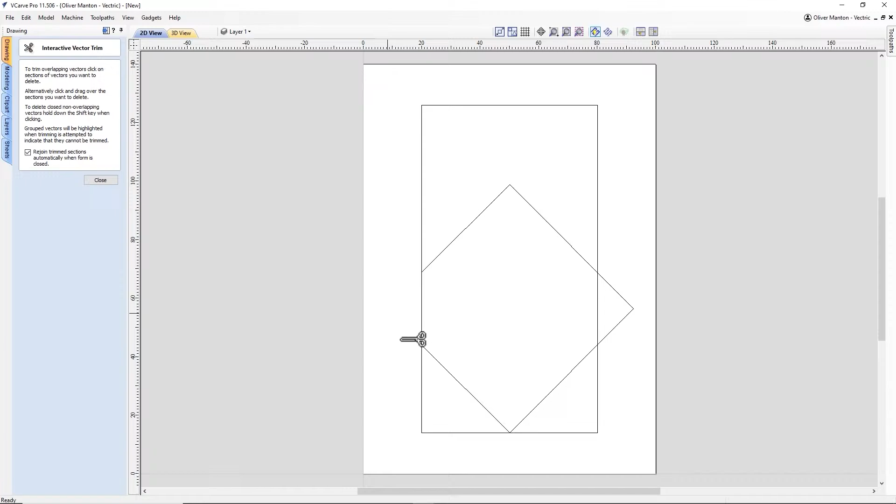For the next step, I'm basically going to be snipping away any vectors that I don't need, because we don't need these. We just want the point. I've ticked the rejoin the trim vector section, part of the form, so that it will rejoin all the vectors automatically. Just go through and cut out any vectors we don't want. Close that down, and then you'll see that we don't need to join any vectors. They're already all joined for us.

Next part is we don't want these square corners. We kind of want a rounded corner, so we're going to go in and fillet these. Okay, for this bit we're going to offset in by about 5mm. So this is going to basically create the basis for where we're going to pocket out.

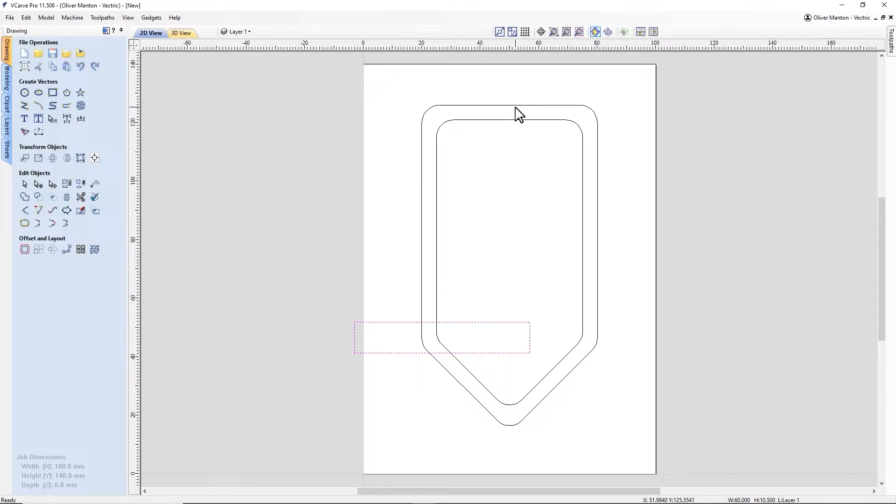Okay, so we've got that there. So the next step is I want a bit of a gap at the top to put a hole through the material, so you can put a ribbon or some thread through to hang the medal or badge around your neck. So I'm going to go with a width 60, 10.5. So this is just going to be a guide for where to position these vectors.

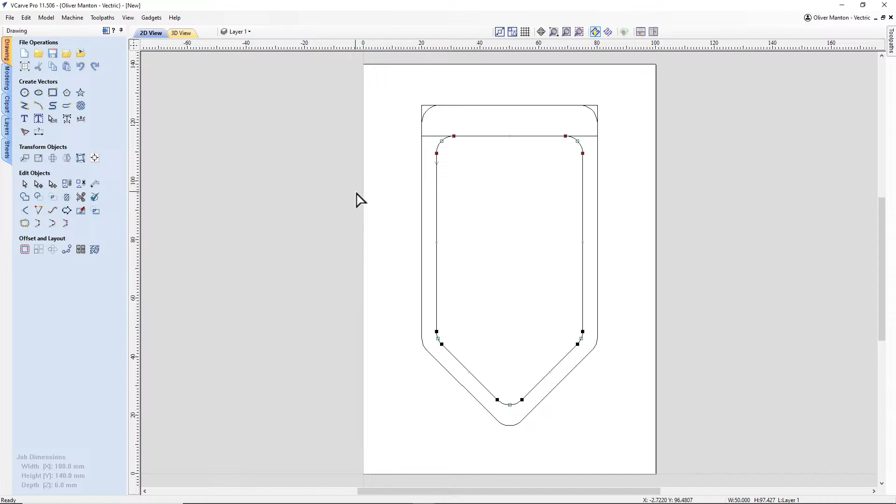So I'm just going to go into node editing mode, move these down to the bottom of that box. Okay, so that looks good. The next thing I'm going to do while I've still got that box is create the actual hole, or the vector for the hole. It's going to be a width of 15 and a height of 4.

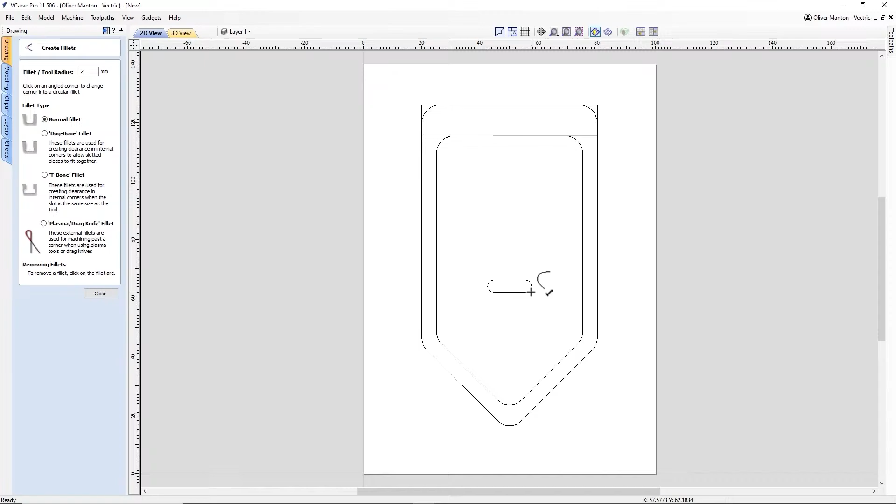We'll then fillet the corners to 2 mil because I want them basically to be a full circle on each end. And I can use this box to center that. And I'll get rid of this guideline.

Okay, so it's starting to come together. For the next step, I want to create the diagonal line where we're going to do some V-carving, because we're just going to pocket out the top and bottom parts here. So I'm going to create a box with a width of 100, so that I'm sure that it will go across, and 11.3 mil in height.

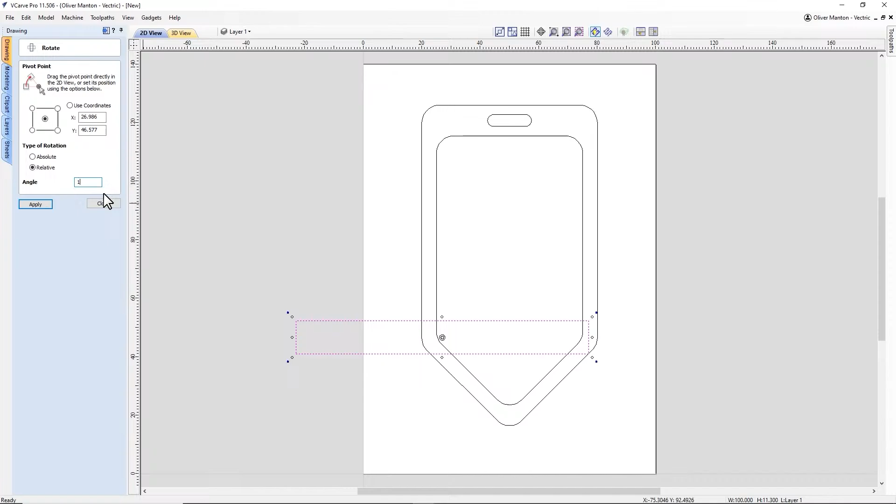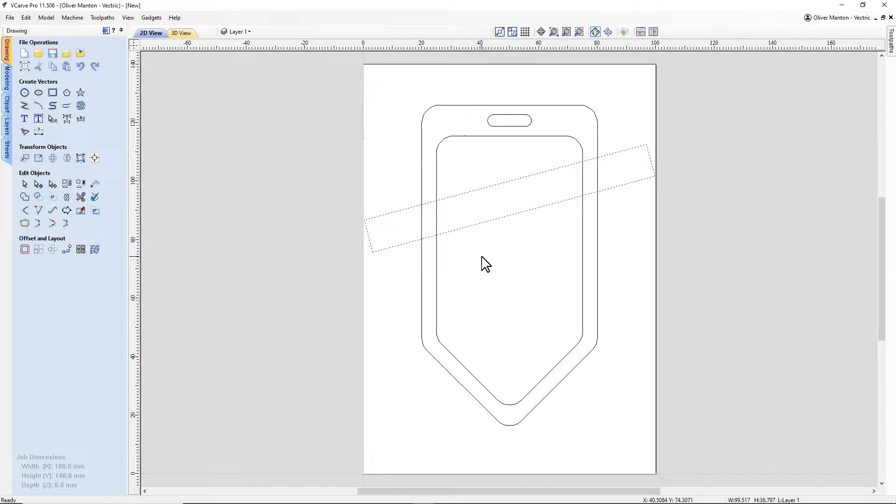Then click R on the keyboard again to rotate, and we're going to do this by 15 degrees. We're then going to center it to here, and then I'm roughly going to line it up. That looks about right. And then we're going to use the trimming tool again to trim out these vectors. And we've still got the rejoin tick on, so that it's going to rejoin all the vectors for us.

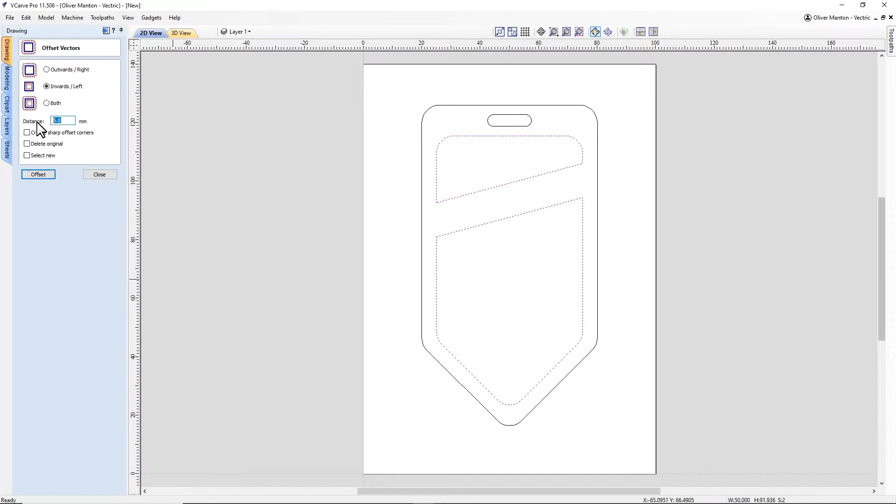So for the next step, we're basically going to be offsetting some of these vectors. We want to offset both of these inwards by 2 mil. And then we can now start adding the text to it. So I'm going to start off by adding the maker, or the text that's going to go here, that's going to be V-carved. So I'm going to draw another rectangle, but this time with a width of 50, and the height I'm going to put as 8.

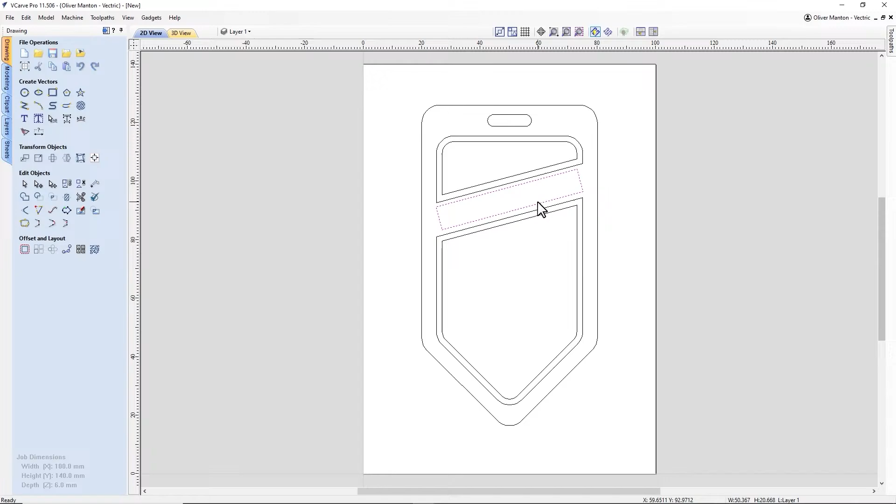And then rotate it by 15. And then center it to the outside vector. Then move it up until we're happy with where it is. Okay, we'll then click this box.

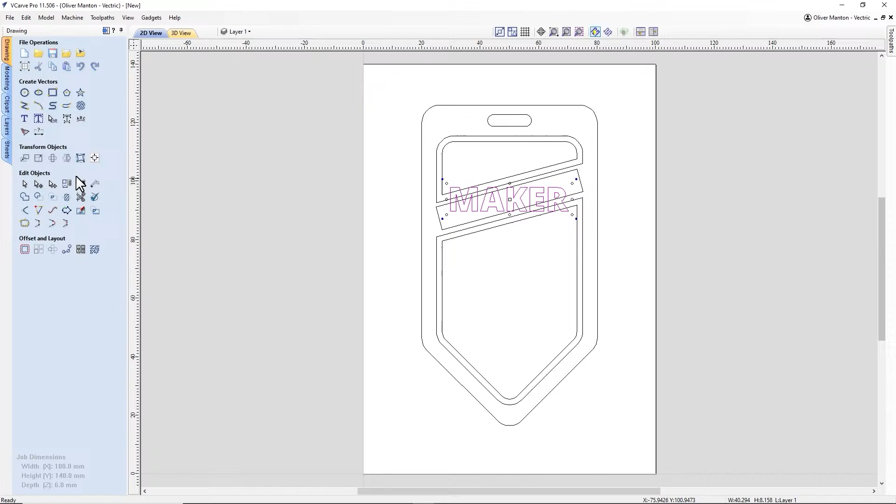So the font I'm going to go with is Open Sans Extra Bold. And then what I'm basically going to do, rotate it by 15, is try and get it to fit the box. So we go there. Okay, that looks good.

Okay, now we're going to do some distorted text for this top bit. So I'm going to write Vectric UGM and get it to fit within this space. So what we first need to do is offset the vector inwards by 2 mil. Then we can shift the vector over here.

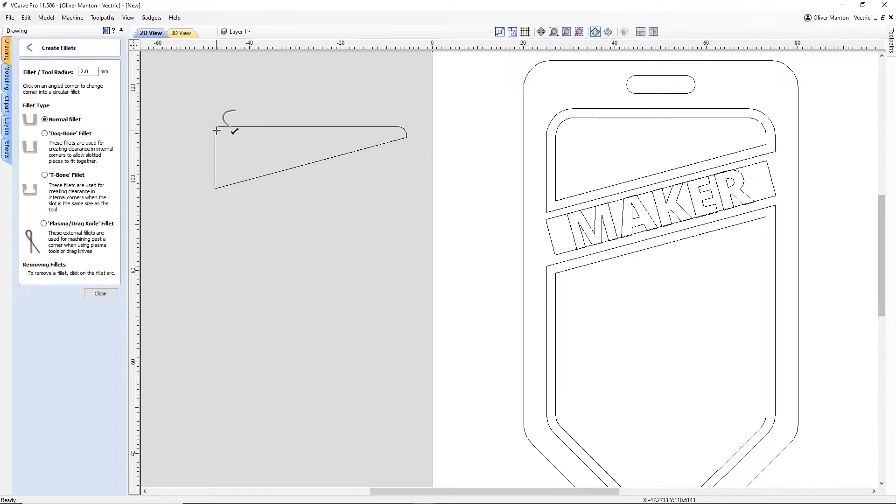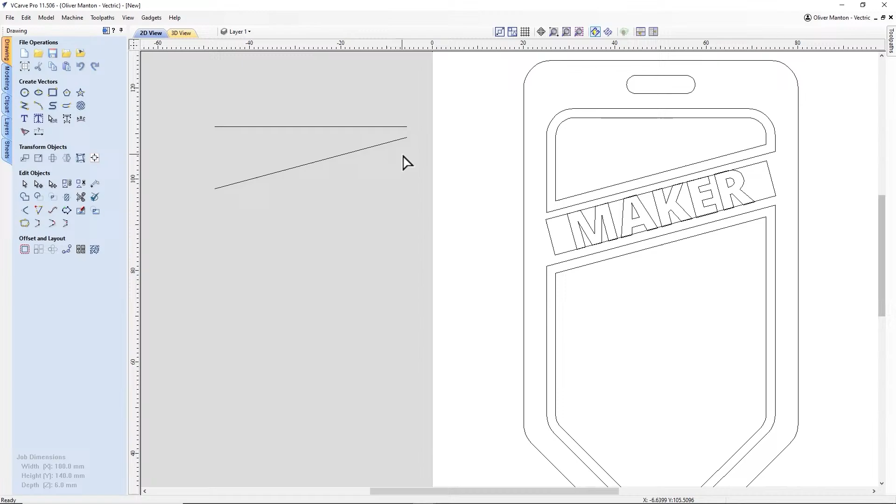So basically I'm going to take out the fillets or the rounding of the corners, so I can then get rid of these 2 side lines, because we just want the top and the bottom vector to distort it with. So if we then click N on the keyboard for node mode, and then delete these, delete the points. Okay, now we've got the vectors, we just need to do the text.

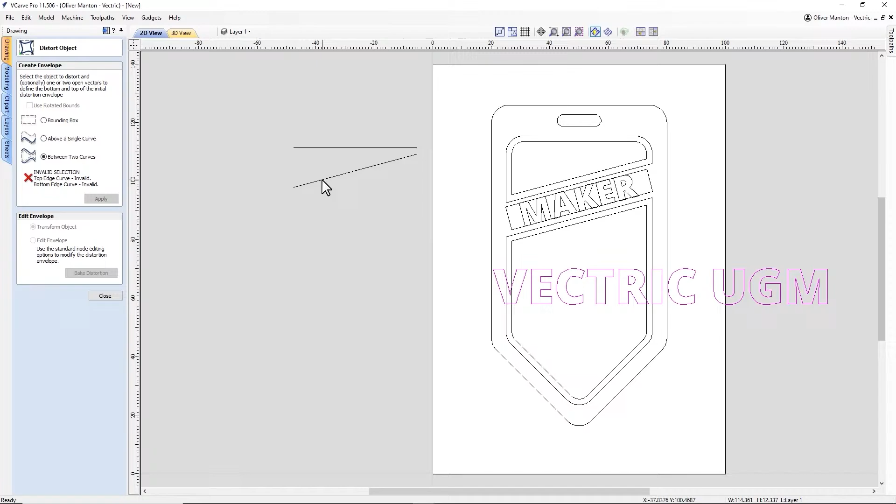So if I type out Vectric UGM, close that. What we want to do is use the distort selected objects tool under transform objects. So we're going to click this and then go between two curves. We select the text, the bottom vector, and then the top vector, and then click apply, and that's now distorted the text.

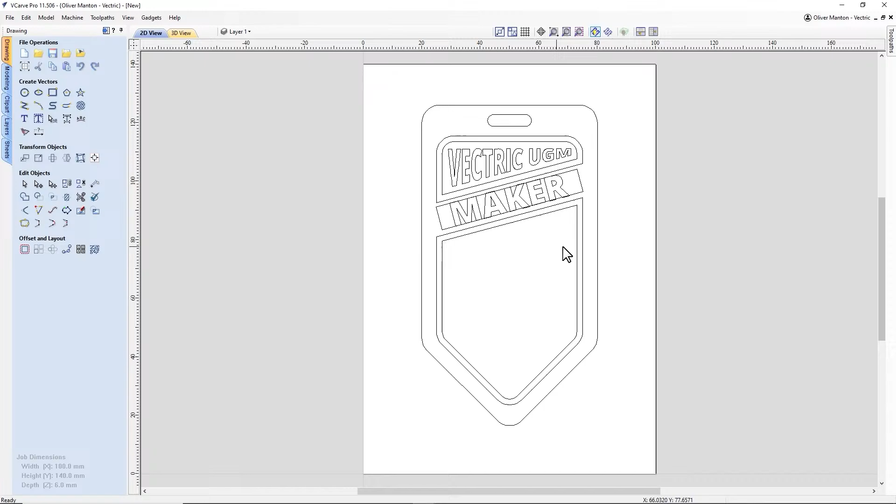Now that we've got that, we can, with the text selected, select this one and then center it in place. We can then delete these vectors because we don't need them anymore. And then that's that top part done. So for the next part, it's going to be the name part of the badge or the medal.

So what I'm going to start by doing is creating a box. It'll fit in there. It's about 11, 12 mil high. We're then going to use that to put the text in. So I'm going to just put my own name for the moment. So basically by bounding it to this box, any text that we put in there will then fit to that box.

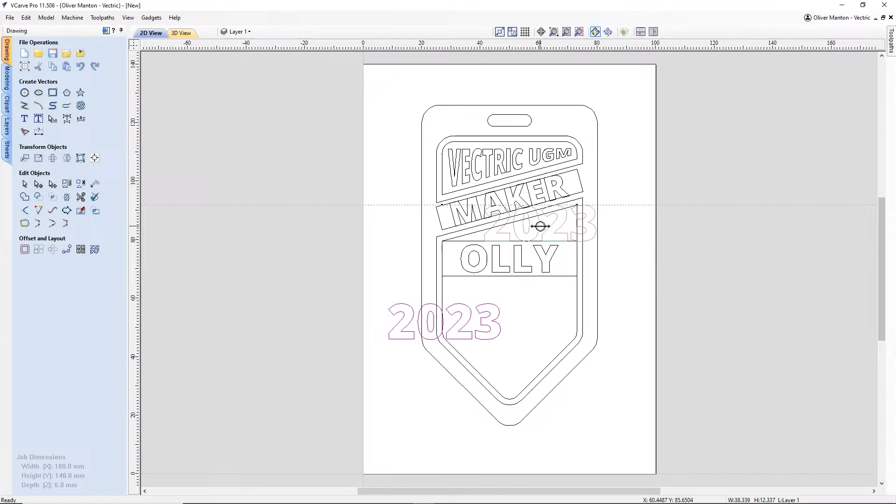So for example, if we had a longer name like Charlotte, it would then shrink to the size of the box. I'm going to leave it for Olly for the moment. And close out of that. So that's that bit. The next part of the text that we're going to do is the year. So we're going to put 2023 up here, just to signify when it was. Okay. So what we want to do is just bring that up and then scale it down to fit.

I'm just going to do this by eye for the moment. That looks pretty good. So now that we've done all the text parts, it's now on to creating the bit down here.

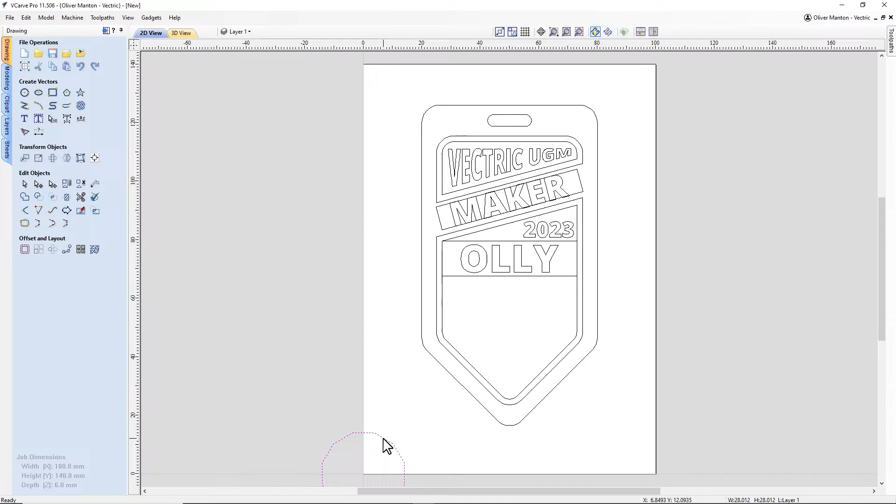So we're going to insert a 12-sided shape or a dodecagon. So the way we're going to do that is if we go into this tool, draw polygon tool, and we're going to create a 12-sided shape with a radius of 14.5. We create that and then center it to here.

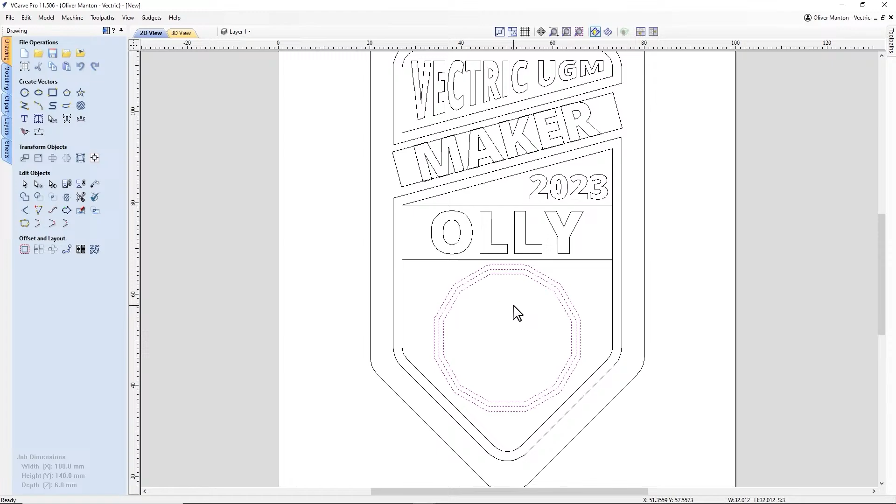Okay, going to move it down a bit, and then we're basically going to offset it, selecting the new vector outwards by 1 mil, so 1, 2, twice. So basically the first vector is going to be for the pocket, and then the other two are going to be the laser toolpaths. We select those and we can just line them up to where we want them. Okay, that all looks good.

Okay, for the next step, we're actually going to import a vector. So if we go to documents, and then we're going to import the V. So basically this is a vector that we've been given from our graphic designer. So he saved out a DXF file so that we can use the vector for this project.

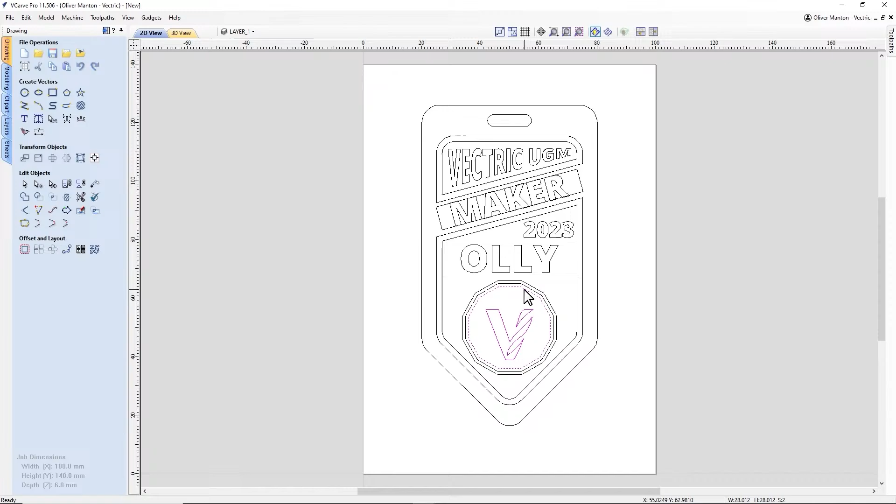If you are creating your own medals or badges, then it's probably worth asking for any graphics like logos, etc., whether you can have them in vector format, because that would really help for these projects. Okay, so we're just going to center that within there and then close that down.

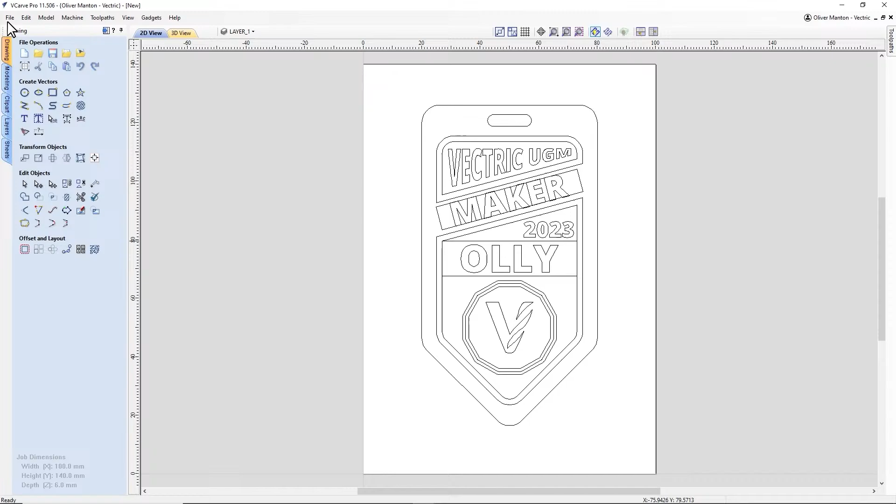And then the last bit that we want to do is just create the map vectors for around the V. So for this, I'm going to import a bitmap. So Vectric UGM, open. Okay. I'm going to move this to over here, just so that we can get the vectors out of the way of all of these other vectors.

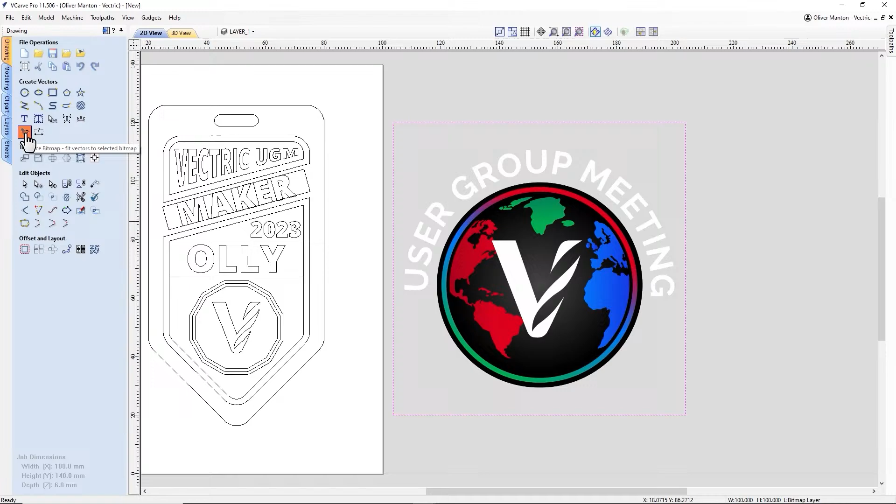Okay, so we're going to want to use the bitmap trace tool, and then we're basically just going to want to select the vectors that we want. If we go around, that looks like, because I only basically want the world vectors, and that's it. So we can preview that and then click apply, close that down.

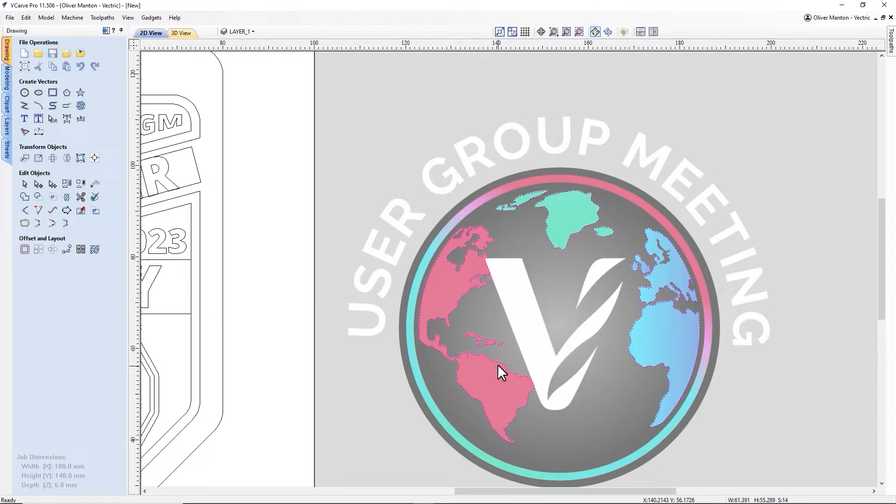Okay, what we can now do is ungroup the vectors and delete any that we don't need. It might actually be easier to select the ones that we do want by deselecting them. Then we can delete the rest out of there. We can then group these objects back together and bring them over.

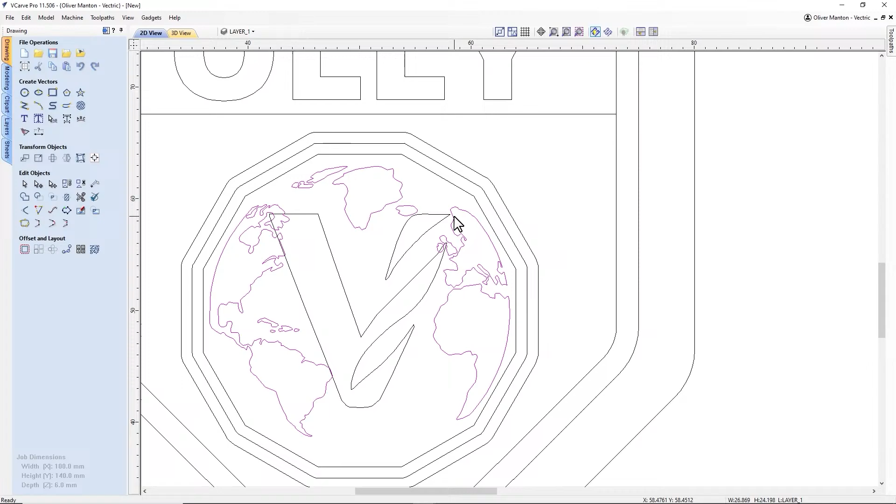So what I'm basically going to do is scale these down to a rough size. Okay, and then we can see if we center it what it looks like. Can actually move up a bit and across. That looks to be good. So then what we can then do is get rid of any crossover points. So what I'm going to do is go around and trim any of these.

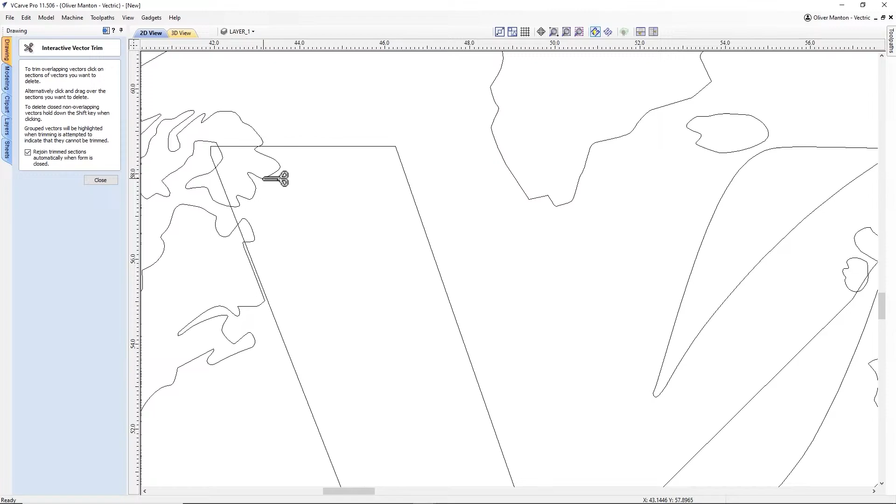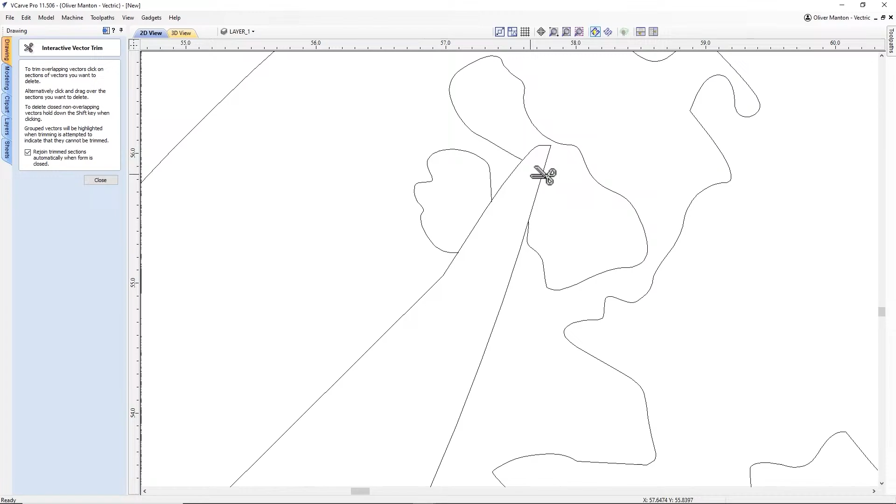So I actually have to ungroup these onto the original layer, and then we can go and trim them like so. And then we can group them all back up together. Then we can get rid of the bitmap because we don't need that anymore. Okay, so that's all the vectors done that we need to do. So it's now time to start doing the toolpaths.

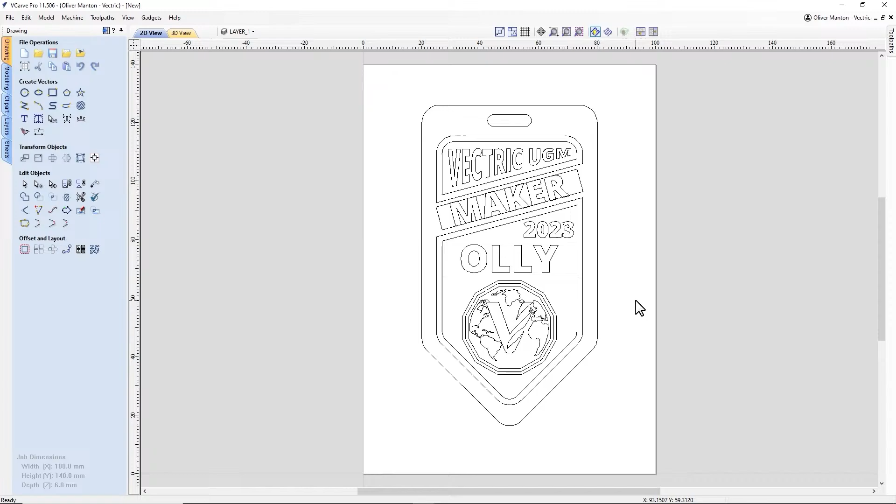Okay, so if we go over to the toolpaths tab and we split the screen so we can see the 3D view as well. So basically, the first pocket we're going to do is actually the pocket octagon. So we're going to pocket this out. Okay, we're going to go down 4mm for this one and then 2mm for the other pockets. So this is going to be the deepest pocket. I'm going to choose a 1/8 inch end mill and we're going to go with these settings.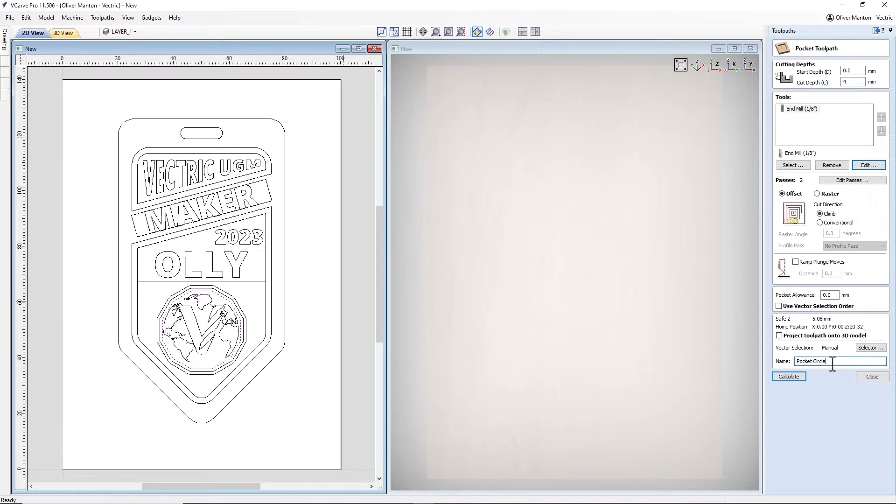Okay, I'm going to name this pocket circle. It's going to be an offset with 2 passes, and then we calculate that. Preview the visible toolpath. That all looks good. Okay, so the next one we're going to do is the big pockets, which are the outside vectors. So these ones, not these ones, because those are the laser ones.

So we're going to pocket down again. This time we're going to go down 2mm using the same tool, 1 pass. So we could name this one Big Pockets. Calculate that. Preview the visible toolpath.

Okay, so the next one we're going to do is actually the maker text. So this is the VCarve one, and then we're going to do VCarve text. Calculate, preview the visible toolpath. That all looks good.

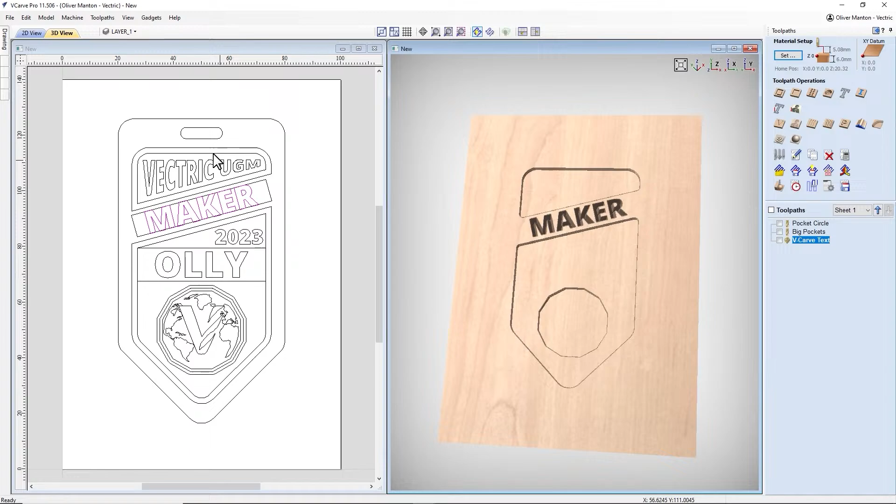Okay, so the next one we're going to do after that one is the pocket on the top. So actually going to use profile cut. We're going to go all the way through our material, so Z plus 0.4. We're using the 1/8 inch end mill again. We're going to go inside the line because we want to cut inside. And we're going to use profile hole top.

Calculate that. So this is basically just a warning to say that we're going to cut through all the way through the material, which is what we want. Preview the visible toolpath. As you can see, that's gone all the way through.

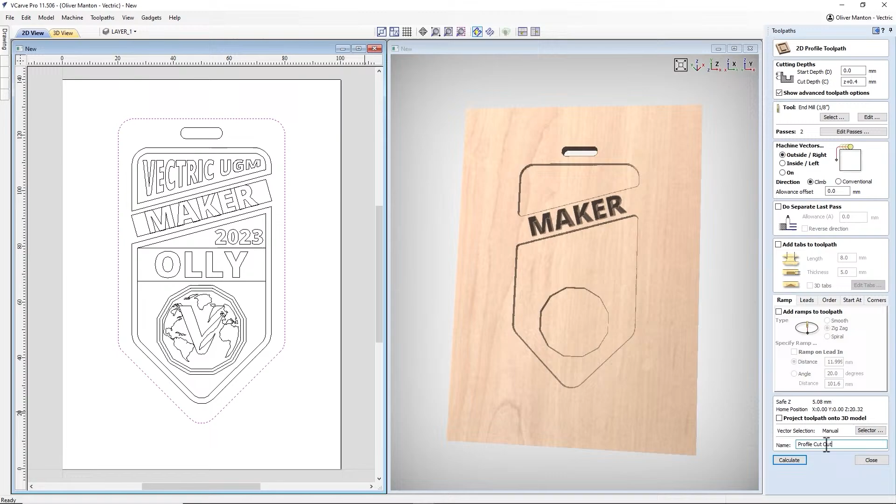Okay, so the final toolpath we're actually going to do using the CNC bits is a profile cutout. So Z plus 0.4 to cut all the way through. We're going to go outside because we want to cut outside the line, and profile cutout. Calculate that. It's going to cut all the way through the material again. Preview that toolpath, and then we can have a look at it in the preview.

So basically the reason why we can do all of these toolpaths first before any lasering is the laser isn't actually going to move the material, it's just going to laser onto it. So we can basically do all the CNC toolpaths before the lasering.

Okay, now we're going to move on to the laser toolpaths. This is where the hybrid machining comes into its own really, because we can then laser onto anything that we've carved out. So we're basically going to set up the laser to laser in these pockets and this pocket here. I'm going to adjust the depth of the laser by 2 mil because that's the depth between here and here, and I'm also going to adapt it to 2 mil down here as well from the material surface,

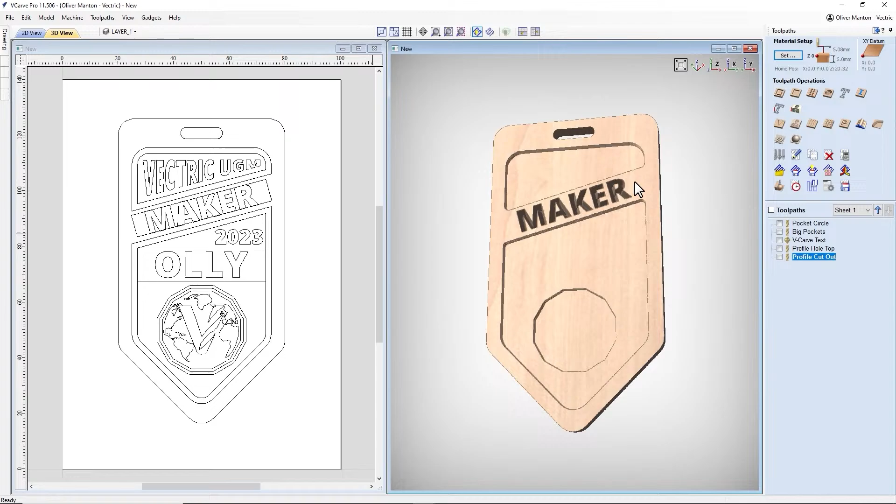which will be the top layer. Okay, so the first part that we want to laser is these two vectors, so the Vectric UGM. So we're going to go into the laser toolpath, and we're basically going to input the settings that we're happy with.

Just to pause quickly to say I did do quite a few tests before actually finalising the settings for these. So I guess depending on your laser and the settings and its power as well, you'll need to probably do a few tests before you actually commit to making your first medal or badge like I've done.

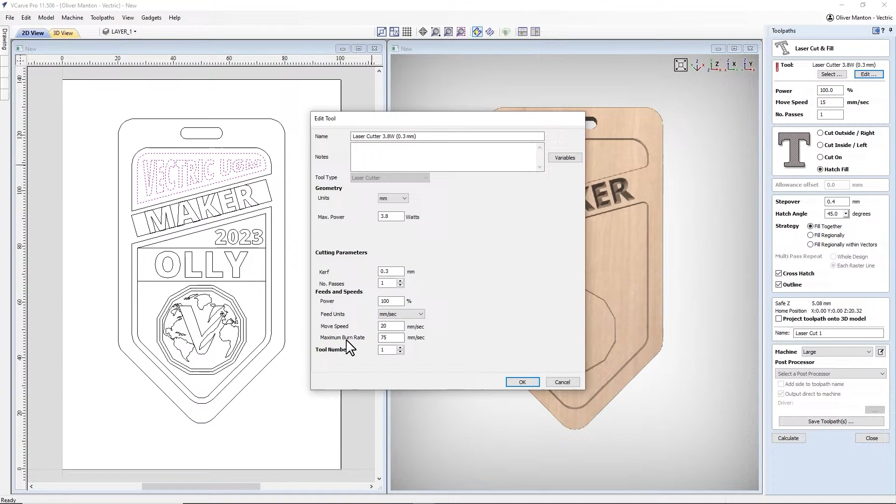So if we start going through the settings, we're going to go for 100% power and 15 mm/sec move speed, and then number of passes is 1. You can also edit these within here. So basically these are whatever your laser settings will be, and the maximum burn rate here is so that in the 3D preview you can alter this so it matches the color of the burn that you're getting from your laser at certain settings, so that you can get an accurate representation of your laser's power within the software. So if we just change that back to 15.

Okay, so for this first one we're going to hatch fill. We're going to go with a step over of 1 mil, and we're going to hatch fill at a 45 degree angle. We're going to cross hatch and outline. So that means we're going to go diagonally across this way, and then we're going to go around with an outline. So that then means that the text and the outline will really be exaggerated, which is what we want.

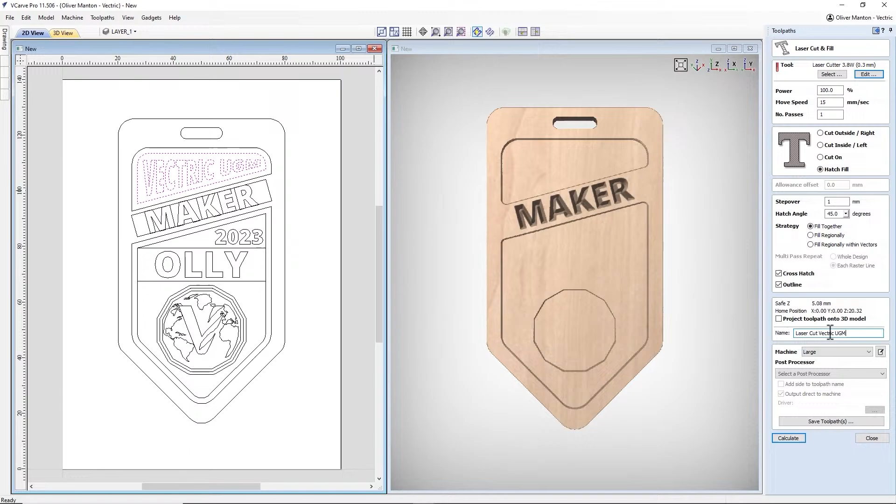And then we can rename this to laser cut Vectric UGM, and we can calculate that and then preview it in the preview. So as you can see, that effect is going to look really good on the contrast from the pale wood and then the darker laser where it's been.

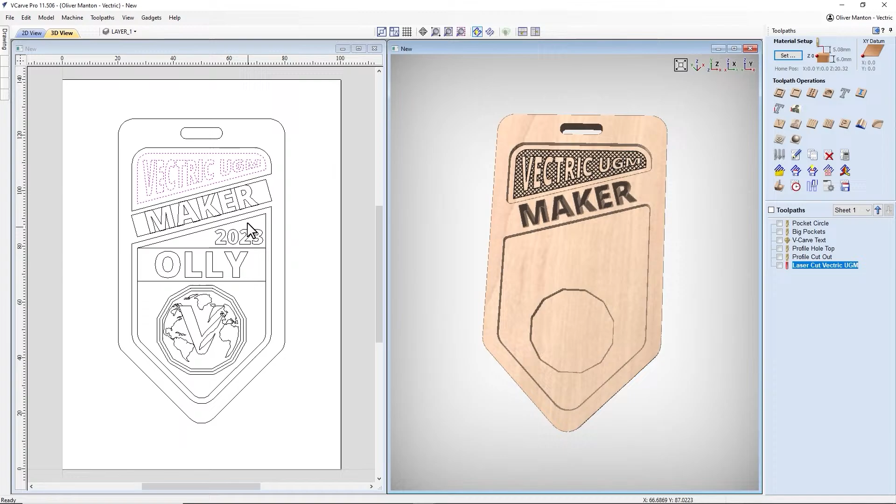Okay, so moving on, the next toolpath we're going to do is the outline. So select that one and then these two, because we've already pocketed out this one. Going to go up to the laser again, and we're basically going to set the power to 100, the move speed of 15 mils per second, pass rate of 1.

On this one we're going to cut on the line. So basically if you're going to cut on the line, it's going to grey out all these settings because these are basically just for the hatch fill. And then we're going to rename this one outlines, calculate that, and then preview the visible toolpath.

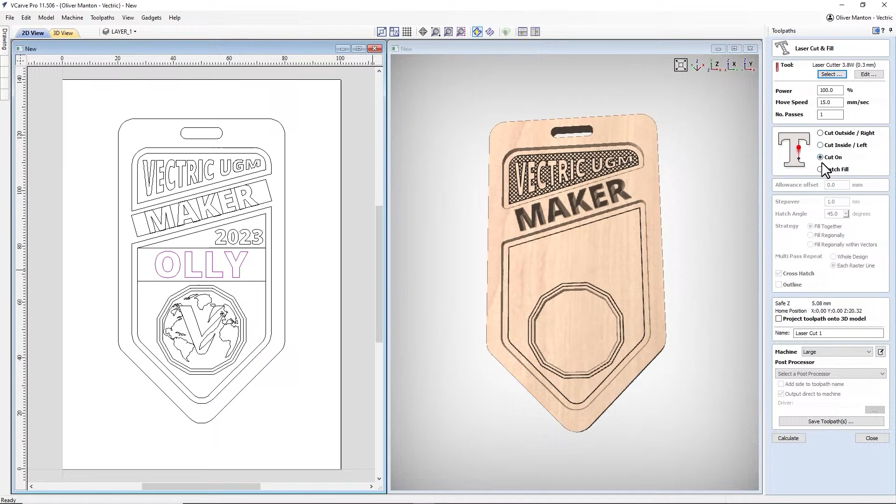The reason why I've gone for this one is just to exaggerate the pocket and also this middle bit to draw attention to it. Okay, so the next one we're going to do is the name. So this is pretty similar to the last laser toolpath we did. So we're going to go with 100, 15, 1, cut on the line. And then I'm going to rename this name and calculate that.

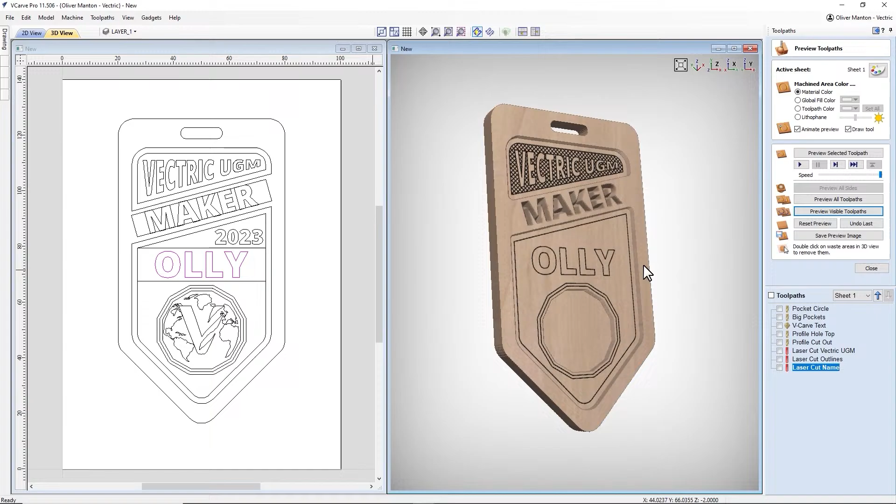You could run both of these laser toolpaths at the same time, but I've decided to run them separately. So the name and the outlines, just in case I want to make the name a bit bolder and run the laser toolpath again, I can do that. So that looks good there.

Okay, so the next one we're going to do is 2023. So this is a little bit different. So basically what we're going to do is we're going to go for 100% power, but a move speed of 20 mils per second. We're going to hatch fill. We're going to use a step over of 0.5 mil, and we're going to change the hatch angle to 0, so it's going to be going horizontal now.

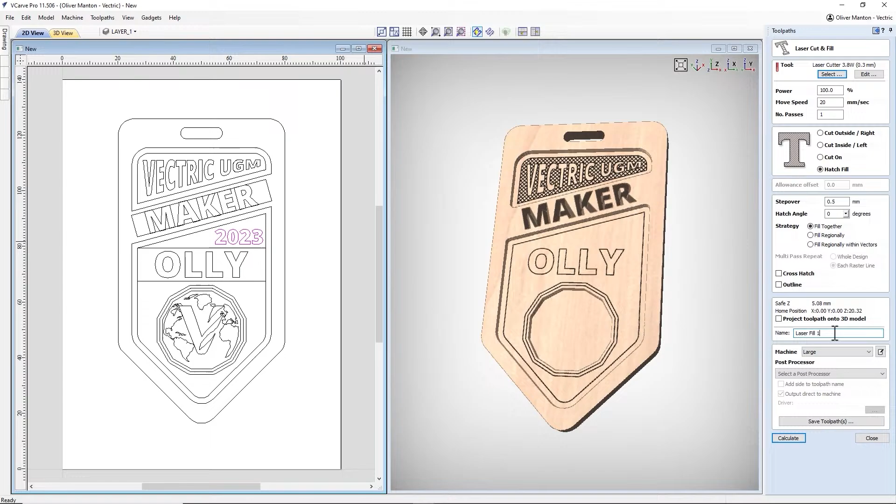And we're not going to cross hatch, we're just going to hatch fill along those lines, and then we can put 2023 here, calculate that, preview that, so it should come out really well and create a cool effect on there, which is just something different.

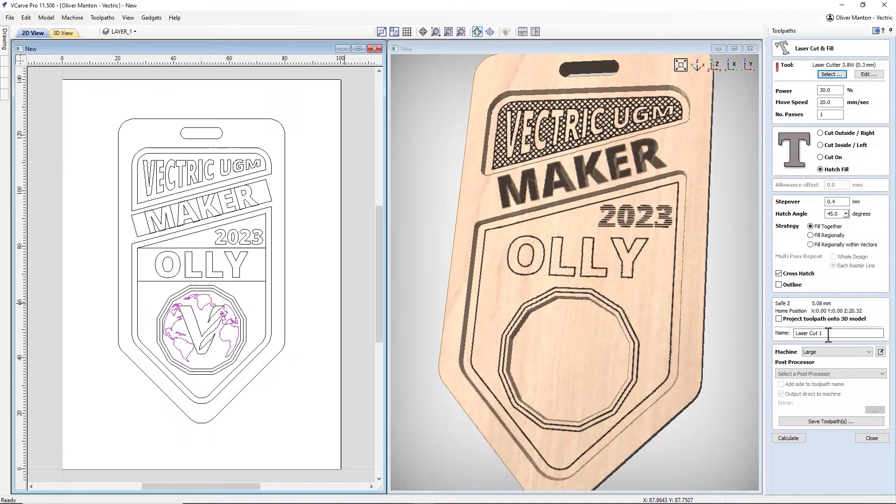Okay, so next it's the map part. So we're going to go in here, going to go with the settings of 30-20, fill 0.4, 45-degree angle, and then laser map. Calculate, preview that toolpath, that looks good.

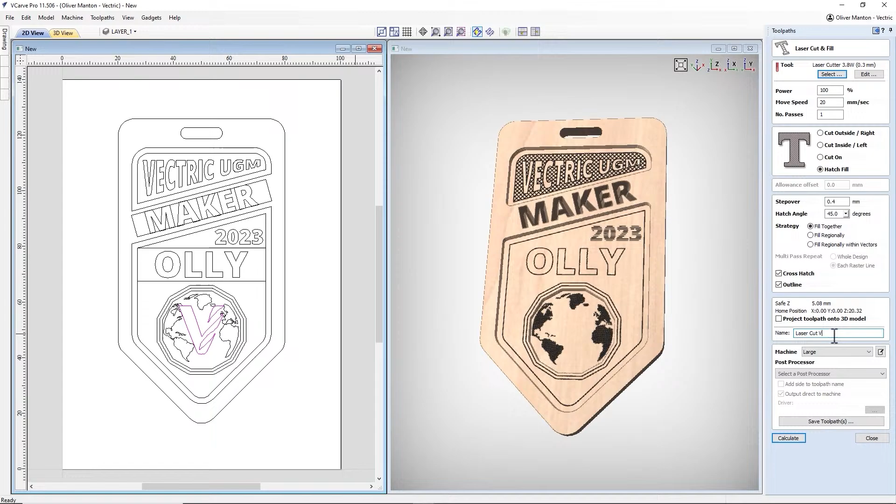Okay, so the last one, the V. So we basically want the V darker than the map, so we're going to go with these settings. So we're going to go 100, 20, 0.4, and hatch angle of 45, and we're going to outline it as well. And then laser cut V, calculate, preview that toolpath. Okay, that's all looking good.

Okay, so now that we've done all our toolpaths, all that's left to do is save them out and get into the labs.

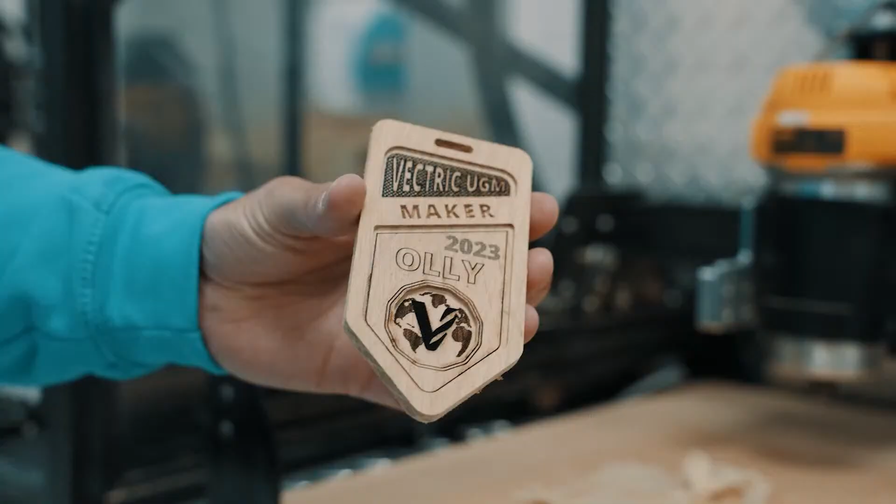Cool, I'm really happy with how that's turned out. Now let's get back into software to create a bunch of these that have been personalised with a plate production feature. So the plate production tool is a really helpful feature if you're making multiple versions of the same thing. For example, these UGM badges or medals.

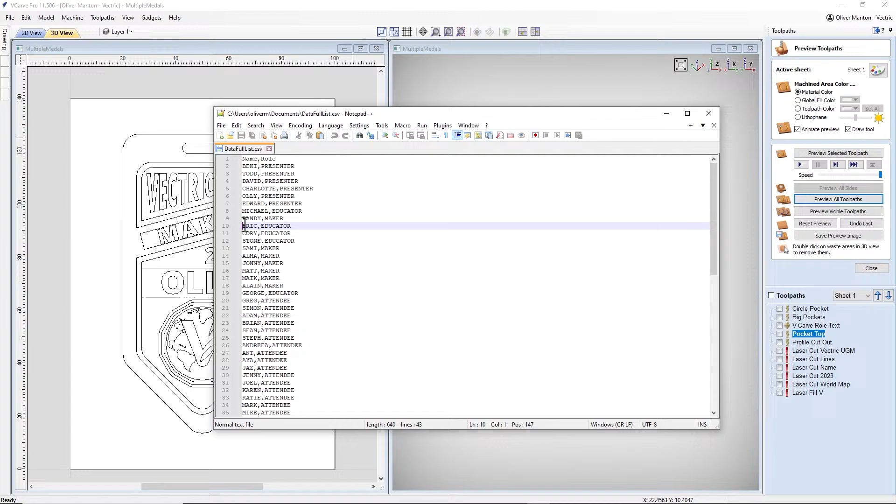So basically what it does is it takes a list of fields within a CSV file and it then outputs them into the software, duplicating all the toolpaths and all the vectors for as many fields as you have. So it's a really quick and easy way of outputting lots of data and lots of the same thing without having to copy all the vectors and then go in and edit all the names, etc.

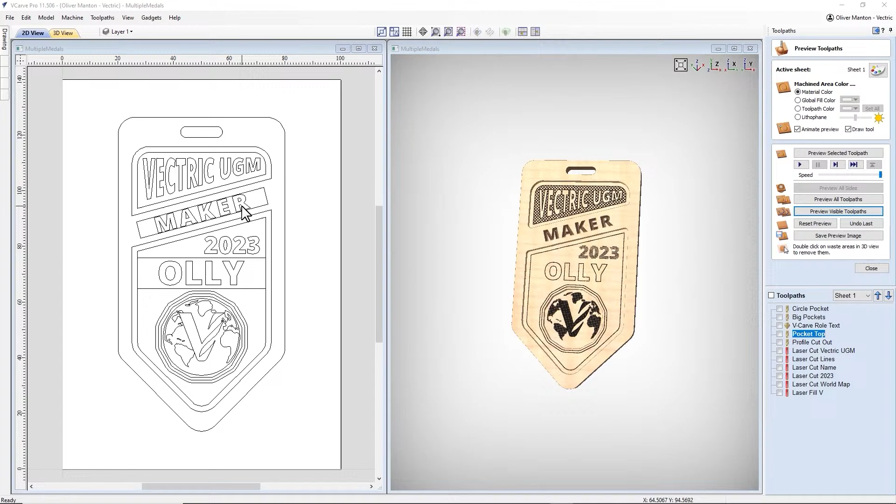So the first thing we need to do when thinking about what we're actually going to do for the plate production tool is work out what fields we want to change. So in this example, I'm going to be changing this field, so that's going to be called role, and then this field, which is going to be called name. So basically, when we go into the spreadsheet, we're going to be creating two columns which match up with the amount of fields that we want to change.

So if we just go into a blank spreadsheet, we can start to create the data that we need. So first column will be name, and then the second will be role. Obviously, the more columns you have, the more fields that you can change within your design. So these will correlate with the variables that we select within the software. I've already pre-populated some data that I've just copied in.

So I've got basically a list of names and then a list of roles that I want to create the medals. As you can see, we've got 41 fields here, which is 42. So if we exclude the top line and just this data here, we've got 41 medals that we want to make. So the next step will be saving it out as a CSV.

So if we go File, Save As. So within here, we want to basically be saving it out as a CSV. So if we go down to this drop down, text CSV, we can then rename this to data full list of medals.

Click Save. This will then bring up this, so use CSV. And then within here, we want to click the drop down, select the comma one, and then the string delimiter is quotation marks, and then save the cell content as shown. We don't want to formulate anything. Basically, we want to save it out as a basic CSV file with commas to separate the values. Click OK, and that will save that out.

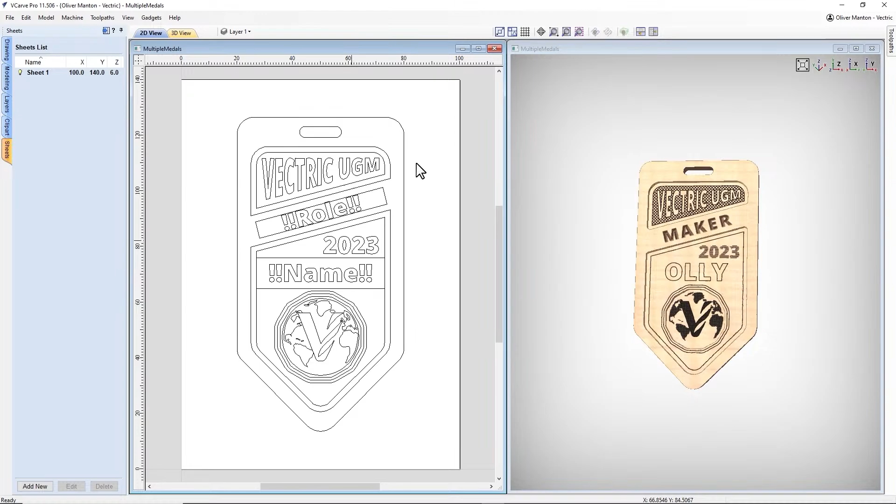So next thing we'll need to do is, obviously we need more material because this is just enough material for one. So to start off with, I'm going to create quite a big sheet, and then I'm going to show you how, depending on your size of sheet, it will depend on how many sheets it then outputs. So if we start off with quite a big one that will fit all of the medals we want into one space, I'm going to go with a width of 700 and a height of 650. Click OK.

And then go back to the drawing tab. So for this part, I just want to reset the preview and make sure that we've got all the toolpaths we want, because once we've used the plate production tool, it's quite hard to change any of the toolpaths or any other vectors within it. So it's worth checking that you've still got all the ones that you want.

Okay, because we've increased the sheet size to quite a large sheet size, it's now looking blurry. So a top tip here is you can go into toolpaths, preview simulation, and set it to whatever level you want. Obviously this is personal preference, and if that was okay for you, then you don't need to change this because it will slow down your previewing time. So we preview all toolpaths again. And as you can see, it's much clearer now, which is what we wanted.

The number of plates, so it's automatically calculated the size of the sheet and then the best number of rows and columns. That's good. Okay, now we need to import the file. So if we go data full list, open. This has imported all the data. And then we now need to say how we formatted the data.

So I've actually used comma separated, and I've also included the name and the role, as you can see, as the first column names. If that was unticked, then that would then count as one of the medals, but we don't want that, so it's going to discount that data.

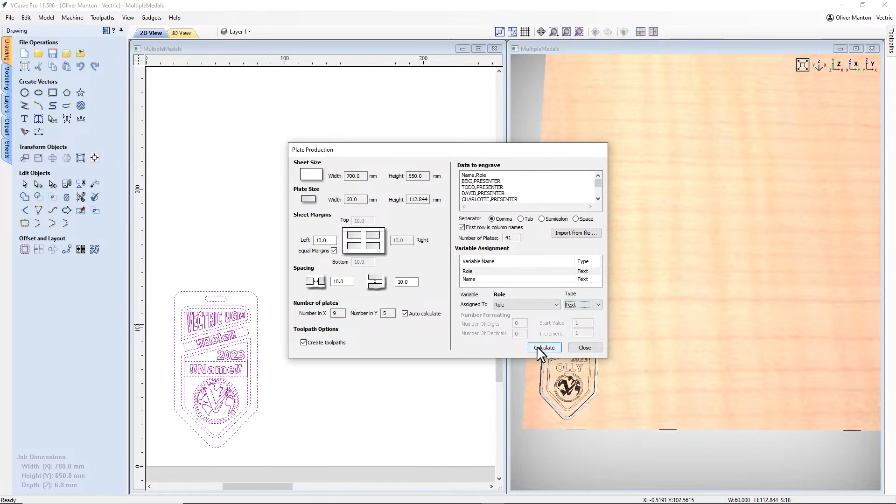We then need to select the right variables, so the right data. So we've got role, which I've assigned to role, and name to name. Obviously, sometimes when you're importing in the data, these might be assigned to the wrong field, so you just need to double check this. And then the type, you can do number or text in here, but all of ours are text formatted. Okay, so now all that's left to do is click calculate.

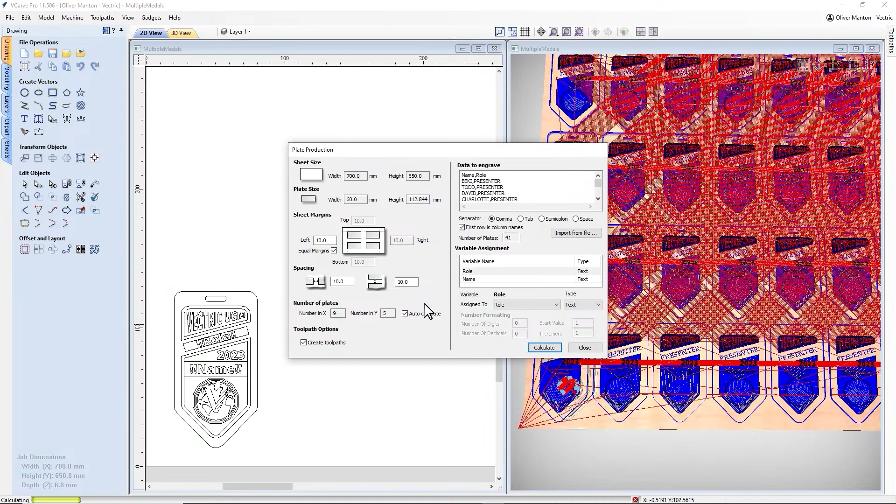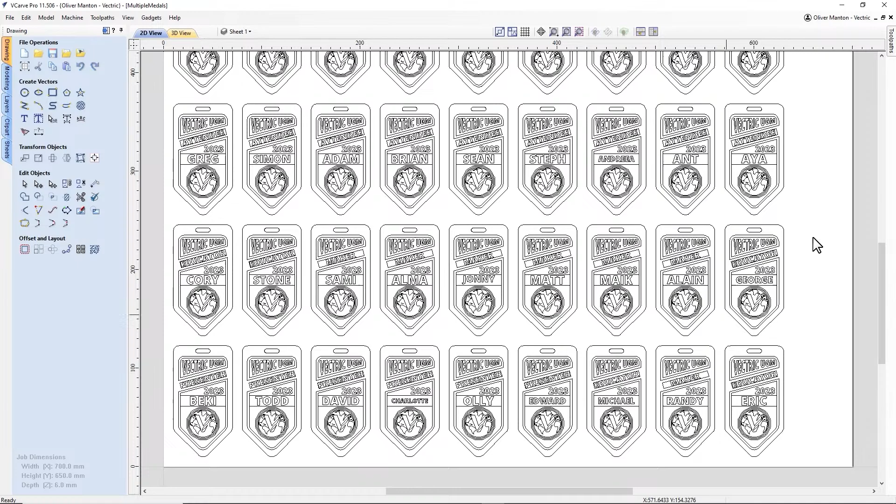So this is basically just going to go through and duplicate all of the toolpaths and all of the vectors with the names and stuff. Okay, now that that's all done, we can close out of this, and then we can check what the output has been. So as you can see, if I full screen this, we've got the attendees towards the top, the makers and the educators in between, and then we've got the presenters along the bottom piece here. So that all looks good.

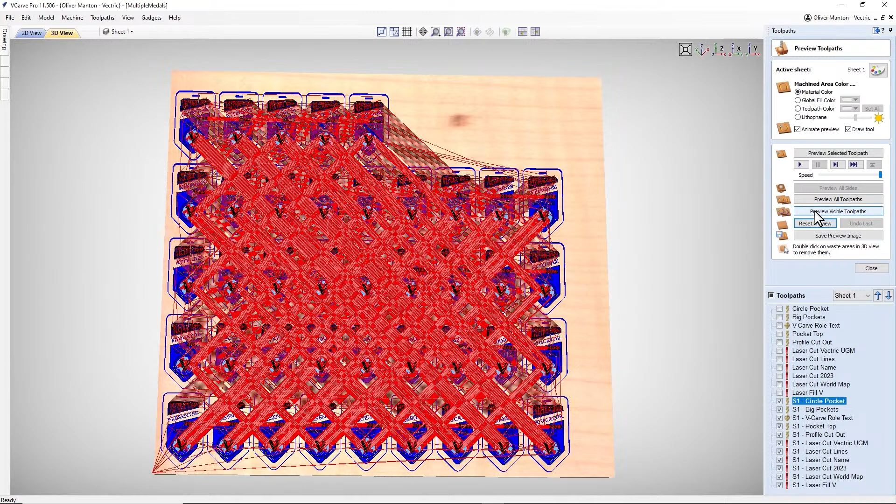And if we head over to the toolpath preview, full screen that. So one helpful thing is, once you've calculated them all, it will automatically only select the toolpaths associated with that sheet. So you can reset the preview and then just preview visible toolpaths. If you did preview all, you're going to be previewing the one medal toolpaths as well, which we don't want. So as you can see, it's just going to go through and run all the toolpaths. So it's going to start off with the circle, then the pockets, etc.

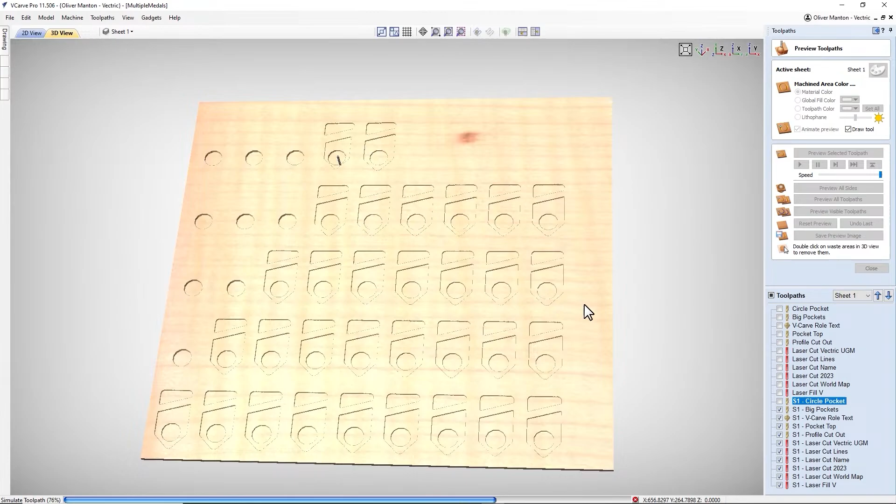One thing that we are actually going to do is move the VCarve toolpath up, so that will make our machine a lot more efficient, because then there will be fewer tool changes rather than changing from the 1/8 inch end mill to the V bit and then back to the 1/8 inch end mill. As you can see, as we've got it on a higher preview resolution, it's taken a bit more time. Yeah, it's all done, and then we can zoom in and see if it's all as we expect. Those are all looking good.

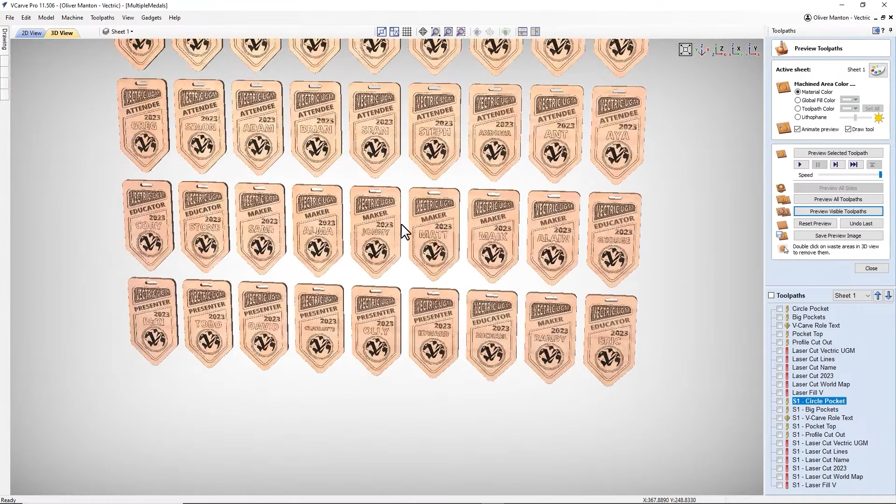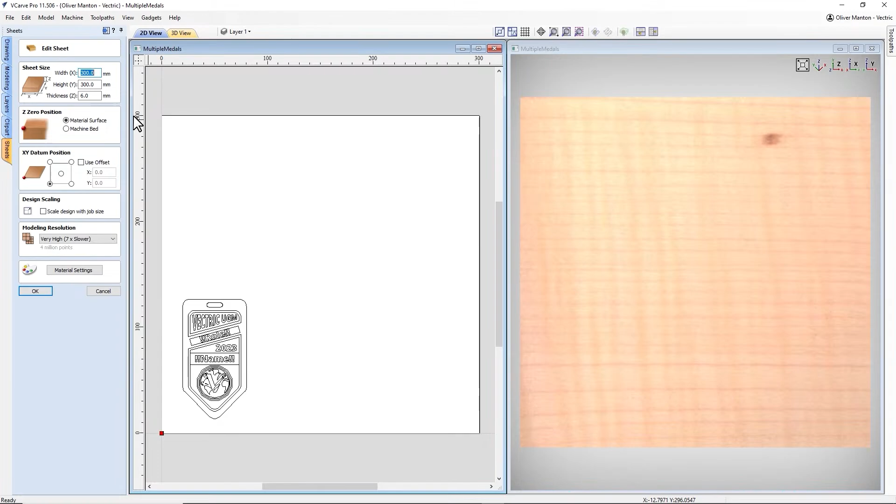So for the next step, I'm actually going to create the file that I'm going to use to cut 3 medals on the machine. This is due to the machine size and the material available. Okay, so just going to edit the sheet size to what I need. So that will be 200 by 300, thickness of 6. Okay.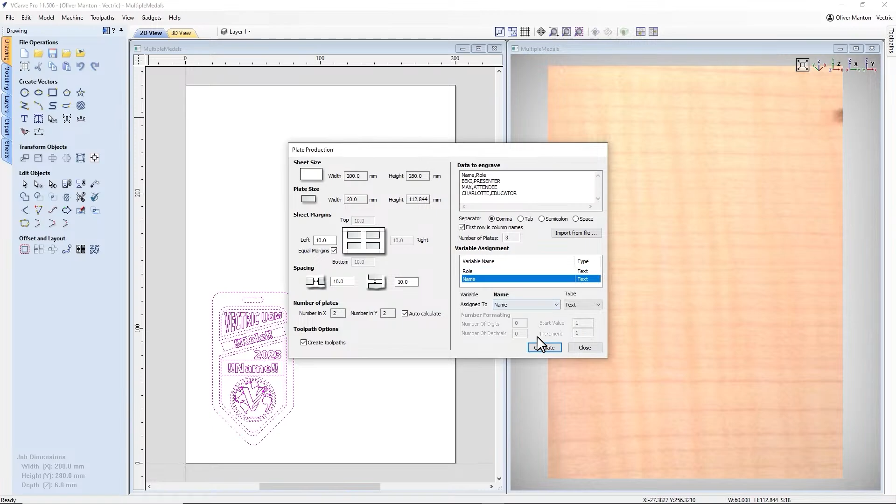Can highlight the vectors I want and the toolpaths, go into plate production tool. So we've actually got another file saved under here, so data, which is just the 3 medals I want to produce. We've got the role and the name. Hit calculate. Okay, so that's looking pretty good. Go over here.

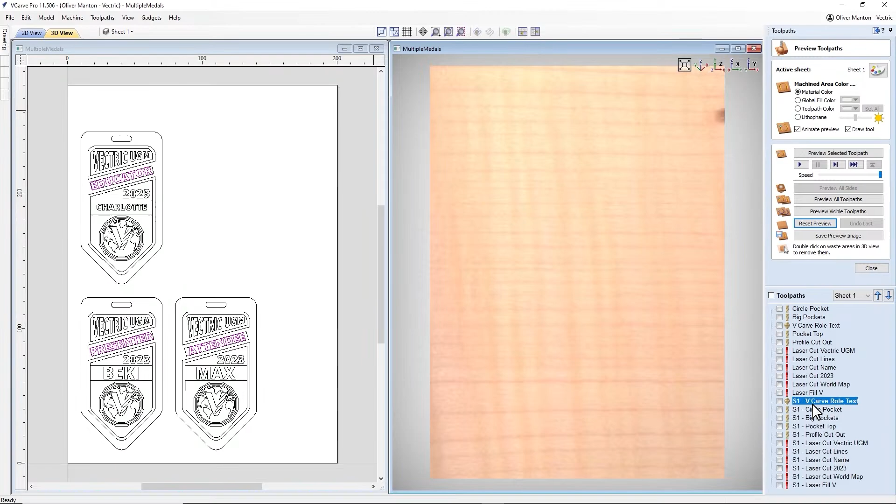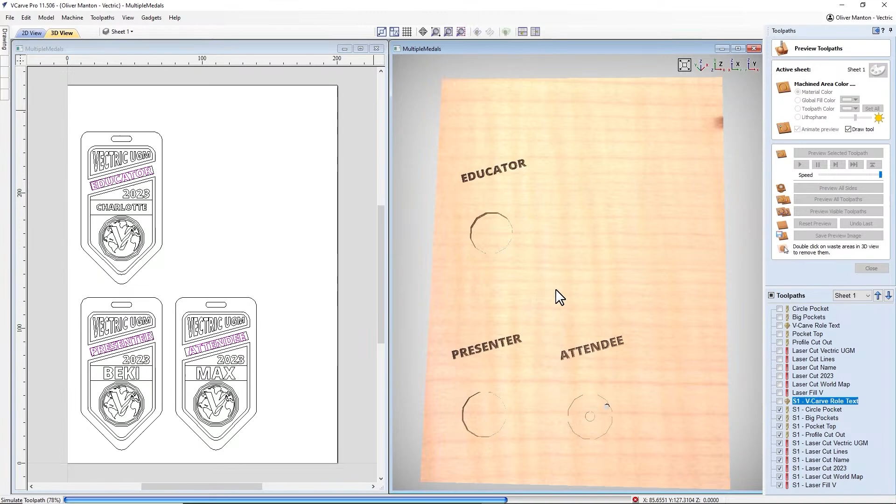Okay, one thing I need to do is put the VCarve in first, because that's what we're going to do for efficiency. And then we're going to change to an end mill and do the laser cuts. If we reset that, preview the visible toolpaths, VCarve in first, and we're going to do the circle pockets and the bigger pockets. Then we got the top pockets and then the profile cut.

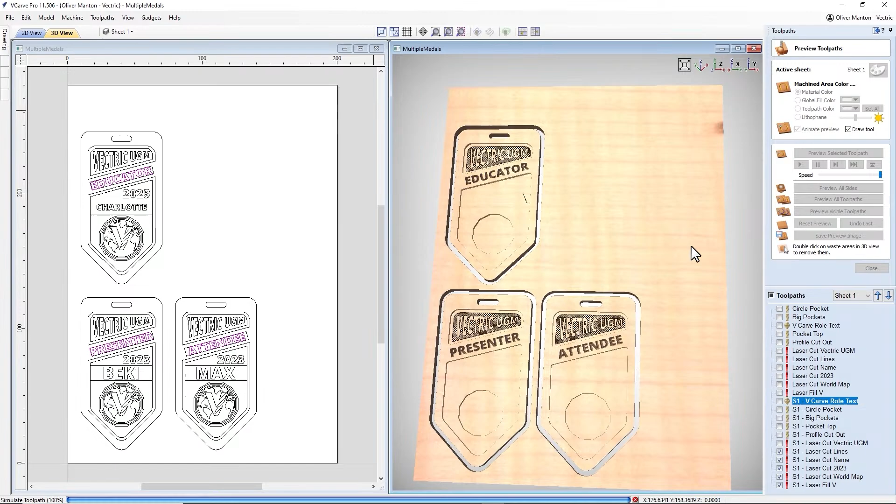We're going to be holding the material down with double-sided tape, because then we can actually profile cut around the medals to give it a smooth finish. Full screen that, they're all looking good. So all that's left to do is save out the toolpaths and head over to the labs.

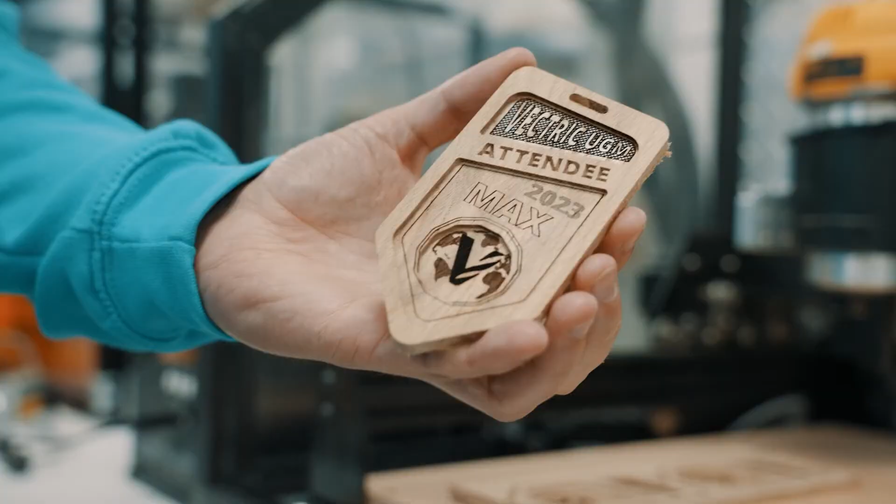So there you have it, a set of bespoke medals that have been personalised and efficiently machined. So just to recap what I've covered in this project: I've done hybrid machining using the laser module. I've also used the plate production tool to turn one medal into several medals, and I've also used the drawing features within the software to create the vectors for the medals.